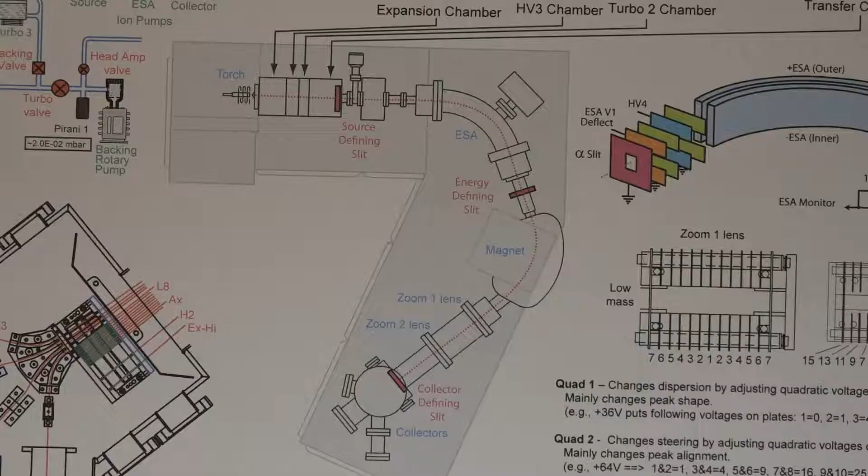What we're mostly going to be adjusting when we are tuning are slits in this transfer chamber here. So we're going to be adjusting things in the expansion chamber, the HV3 chamber, and the transfer chamber. You'll see those in the high voltage tabs and in the source slits.

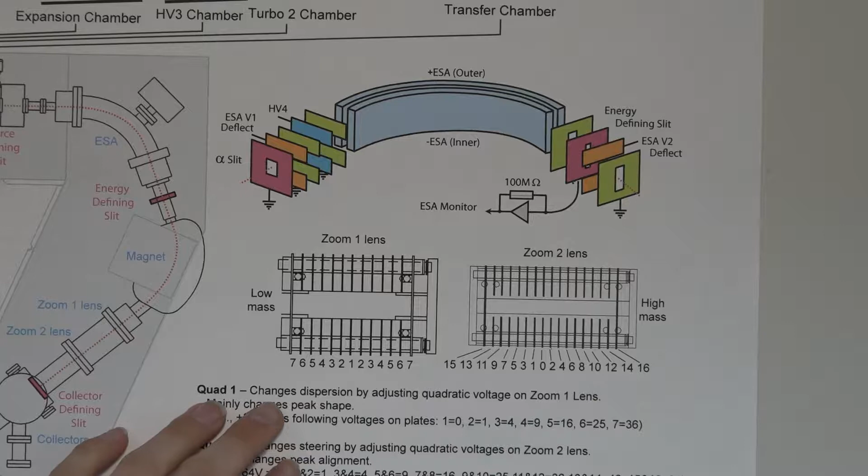After the magnet, you'll see zoom lens 1 and zoom lens 2. Those are depicted here on the right. Quad 1, which is your major shape changer when you're tuning, you're just going to change the quadratic voltage on zoom lens 1. So this is a big one for us when we're tuning.

You may want to adjust zoom lens 2 if your high and low masses are not really matching up and nothing you're doing with linked quads will bring them together. That's when you're adjusting zoom lens 2, and those will be Q16 and 15 correlations. They just adjust how zoom lens 1 relates to zoom lens 2, as you can see here in this schematic. Now we have a vision of what we're moving around.

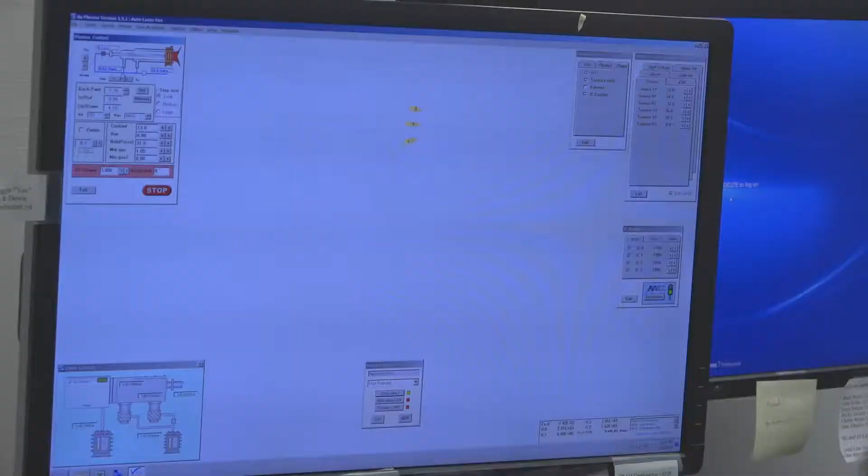Let's get tuning. Now we're on the new computer. I'm just going to recap a couple of things that are important. Over on the left is the plasma control. We can make sure it's lit here by making sure that's red. We've used this VAC button, we've checked reflected power, and we're going to hit a couple of other things for the torch over here later on.

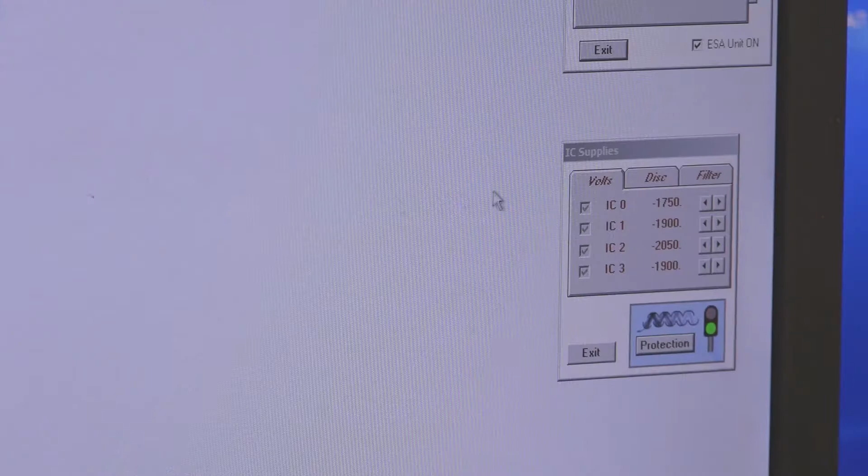As we move down, again, we'll see these valve controls, and we'll just reference our pressures here. Over to the far right, you'll see IC supplies. This is where we turned on our protection earlier. Up on the top right, you'll see the digital control, where we enabled our ion counters, where our high voltage units and source got enabled when we first turned it on.

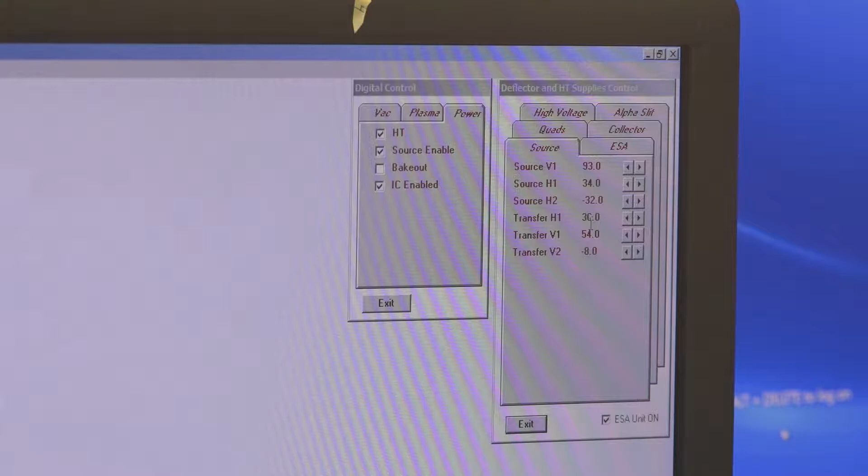We're going to be using a lot of these deflector and high voltage supplies over here, and the supplies control window later while we're tuning. Now we're going to just make sure we're on our right tune setting for whatever we're doing, and we're doing uranium lead with Faradays. We'll go to Setup,

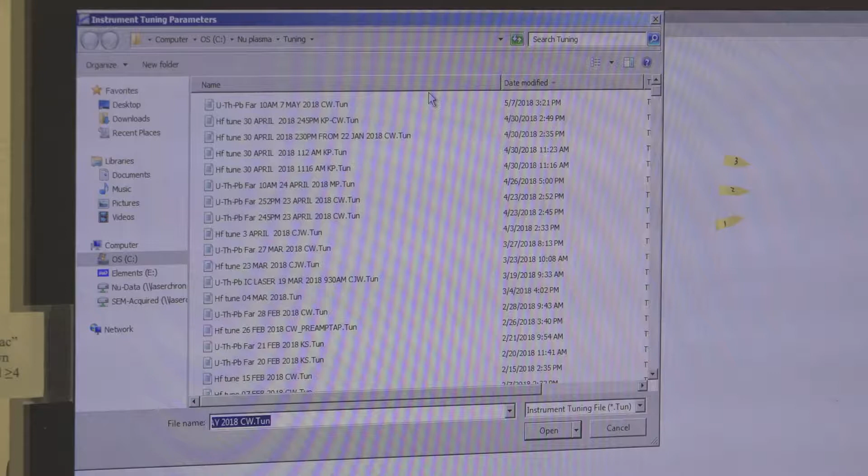Constants, Tuning, Initialize. And we're just going to pick the most recent tune file for whatever we're doing. We're going to do Faradays, so we'll just pick that guy. That's at the very top. And then we will say Open.

All of our deflectors and high voltage supplies will update to that tune setting, whatever those were set at. Similarly, if we move to the left under our plasma control, various torch positions and mixed gas settings will also update to that original tune that we've just loaded.

Once we've opened the tune file we want to start with, we'll go to Scans, Magnet, and that's going to scan across the range of masses that we're going to be using. What you'll notice is you have a start scan reference mass and an end scan reference mass. You may need to update those depending on what was previously tuned for before.

To do that, you'll go to Edit Scan, and you'll just update it to, we run between 214.3 to 215.3. But depending on where the mass actually is, where all of our signal is reading, we may need to change that. So we'll leave it at 214.5 and 215.5 for our Faraday tune. And we'll just save that edit.

And let's enable the grids. It's just a little bit easier to see intensity changes with the grid on. So you'll just tick grid.

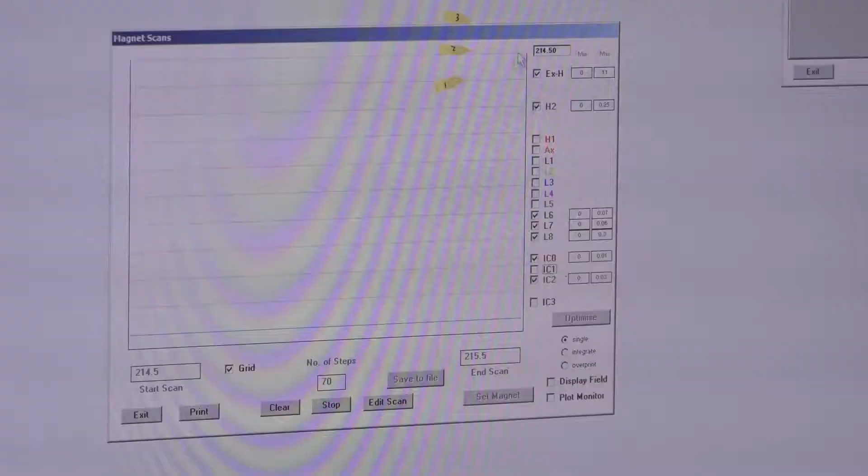We'll also want to enable L6, L7, L8, and then IC0 and IC2. But our main one that we're going to focus on during tuning is this EXH, our 238 uranium. I'm just going to go over to the laser computer and press Start Run, and then Start. And what you're going to see next, as it approaches the appropriate masses, is a little peak form of what we have checked.

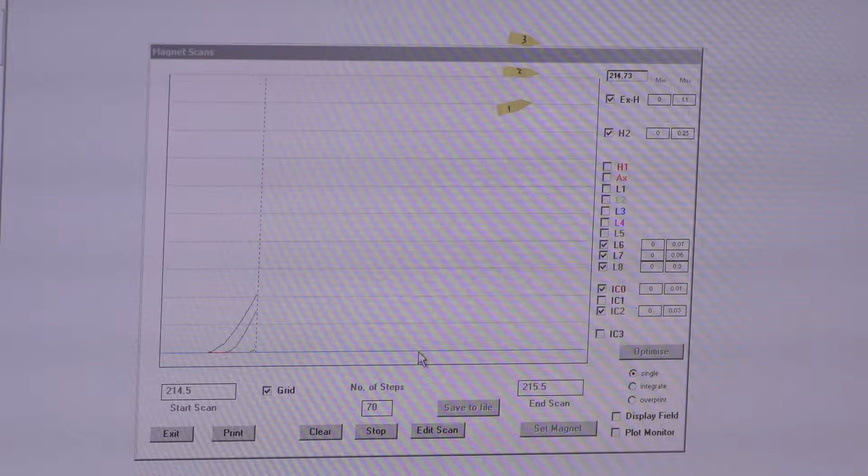Now the problem here is that our scales are a little bit off, so let's go ahead and change that. To change any scale in here in this magnet scans window, you just double click on your min-max, whichever one you want to change. I want to change the max of my 238. I'll double click. It looks like we're coming in at about, let's wait for it.

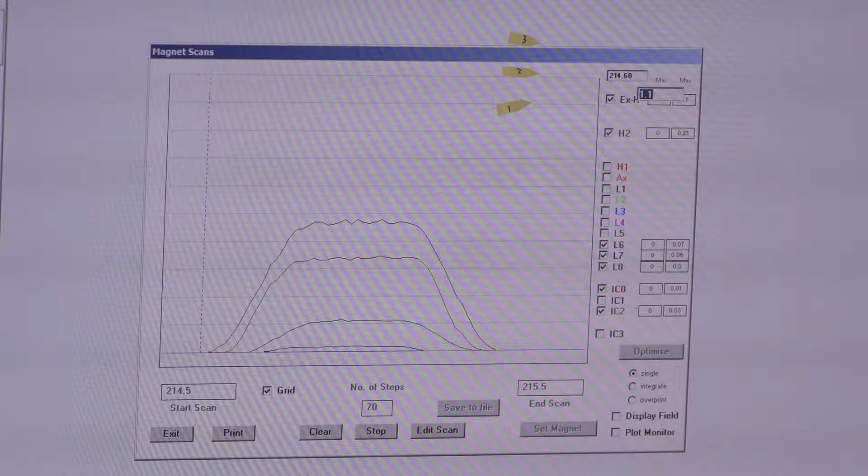At about 500 millivolts, let's put this at 0.9. Anytime you want to increase the height of your signal, you'll bring that max number down. And anytime you want to decrease the height of your signal, you'll bring the max up. That's true for all of them.

So in order to monitor signal, we have a couple of options. We can just watch this line go up and down and set our min max, or we have this cool screen down on the bottom right corner. We can monitor any of the Faraday cups or ion counters that we want live as it scrolls across them on that magnet scans window.

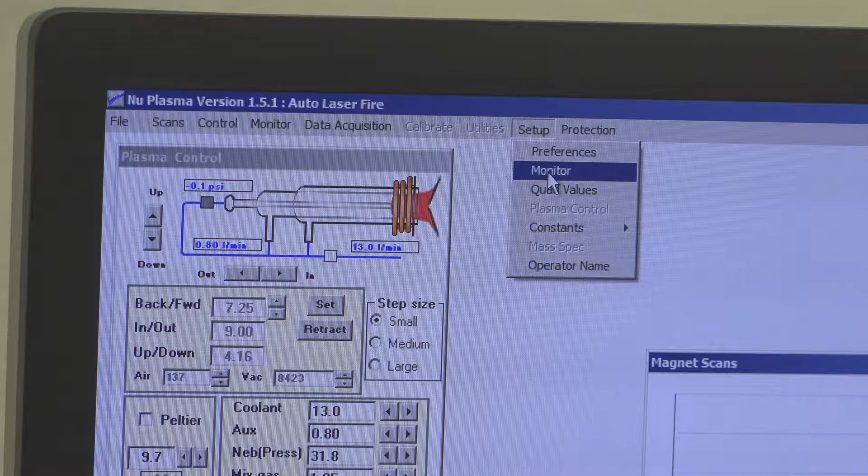So I have what I want now, but if I wanted to change it, I'd come all the way up to the top left to setup. I'd click that, I'd go to monitor. I get the option to look at any one of these that I want, up to about 6. I can watch 6 at a time.

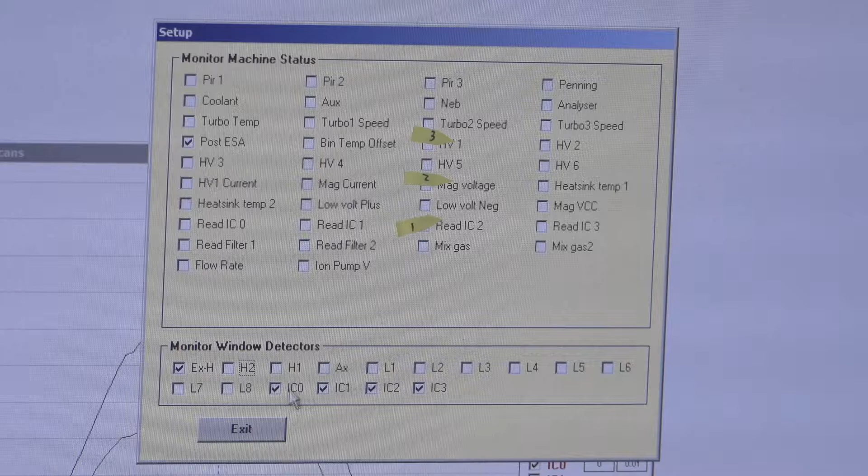So I want to watch my EXH. If I wanted to watch thorium, I could add it in, and then I'd see it add in if I had room. So if I unticked IC0 because I didn't need it, I'd add H2. Now if I move to the bottom right, you'll see that I have H2 instead of that IC0 in there. But we don't want H2, so we're going to come right back up, untick H2, and put IC0 in there. Then we're just going to exit out of there, and now we're monitoring what we want to monitor.

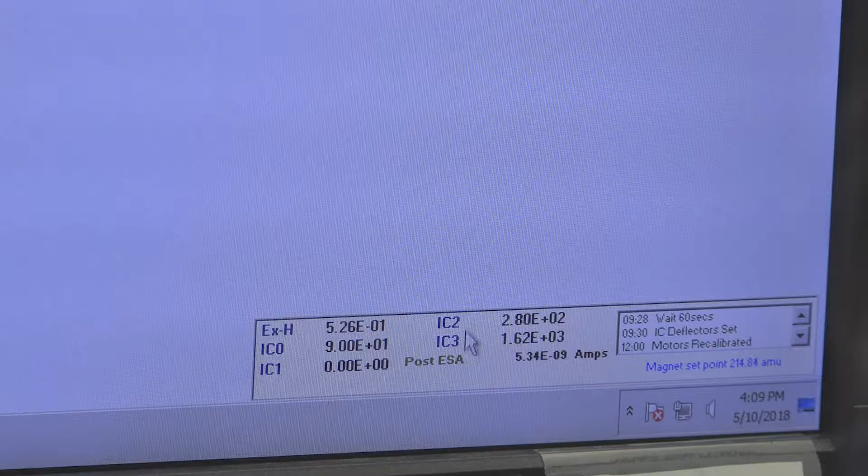So now at its peak, if we look down and monitor our EXH, it's about 500 millivolts. And then it washes out as it cycles through. We'll see it happen one more time. There we go, about 520 millivolts. So that's pretty low for us. We got a lot of work to do here.

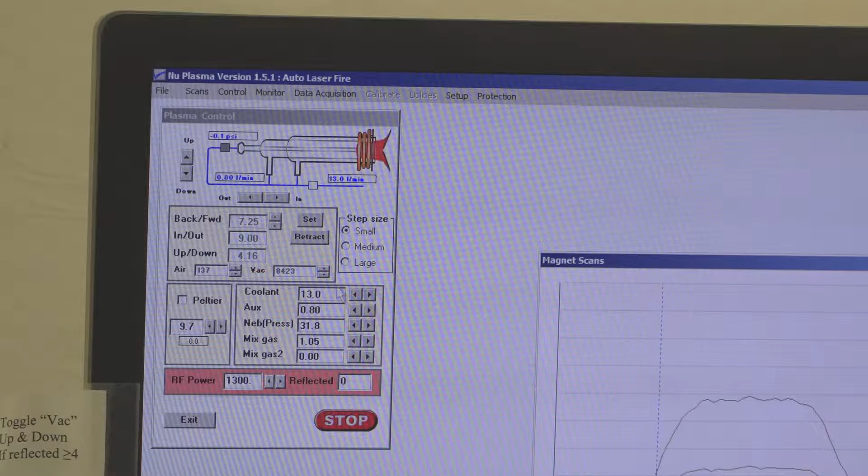The first thing you want to check is torch position. Anytime you have a false start or it just doesn't light right away, your torch will back up. So we're going to check our in-out torch position to see if it's backed up on us. So in-out is reading right here, and it's at 9. It's usually around 6 units, so it's sitting at 9 units now.

So I'm going to go up to these toggles, these in-out toggles, and I'm going to move it in. The one thing I'm going to do is set that magnet on one mass point. When you're tuning and making changes, you want to be on the max signal. So I'm going to wait for this to go through my whole peak first, one time.

Once it's reached the bottom, I'm going to stop. And to peak center, to be on that main peak and watch that over time as I change, I'm going to right-click on this dashed vertical line and drag it into the middle of our mesa. If you don't have a mesa, don't worry, we'll get one. So we'll leave it there.

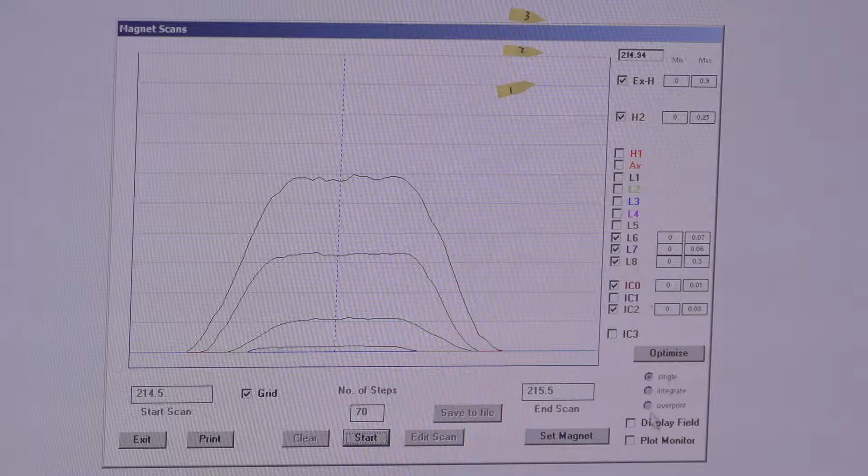Once I found my middle, I'm going to select Set Magnet, that button on the bottom right of your magnet scans window. At that point, you'll see your start scan and your end scan reading the same exact mass. That's what you want when you're trying to just get high peak intensity.

So now we're going to go in-out and change that 9 and kind of move it in and see if that gets us a little better signal. I'm going to just move it in a couple clicks at a time. Be very careful with in-out, you can totally break the torch. Don't do that. So just a couple clicks at a time.

Looks like we're improving it already. We'll do a couple more. It's getting better, we're just going to keep going.

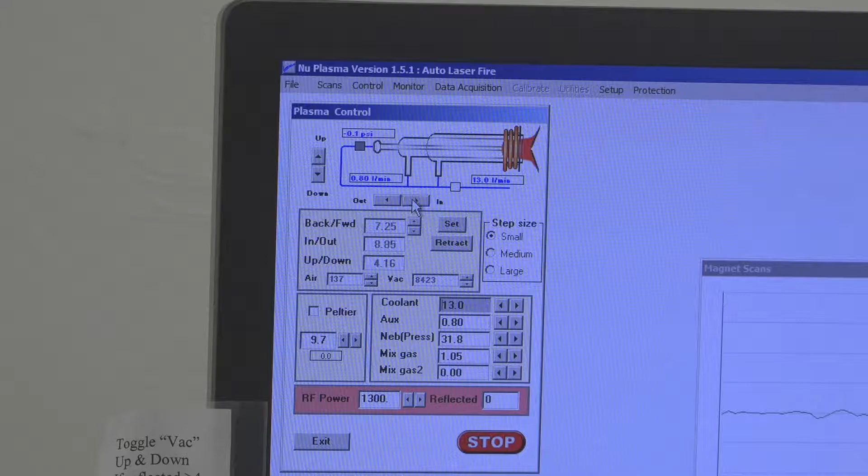You never want to get closer without looking than 6. Once you're at 6, you really need to be paying attention to how much you're moving in. So I'm just going to do a couple clicks at a time until I feel like we've lost any signal increase. It's going to just take a while since we're out at 9.

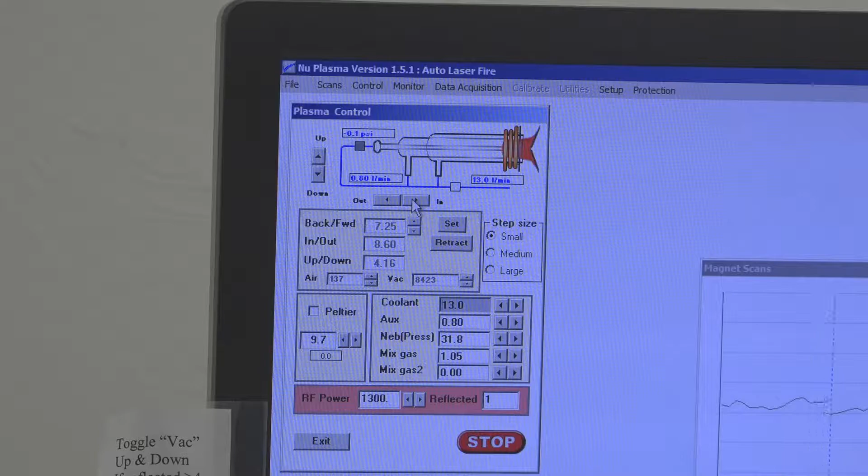And we'll just keep moving it on in. There is a point at which that's no longer true, and then you're too close and you're kind of missing that sweet spot. So we're just going to move in until we find it.

And it just keeps increasing and increasing, and at some point we're going to have to change that max so we can see how much better it's getting. We're at about 7.9 now. We can go at least a full 10 clicks before we need to start worrying about how close our torch is.

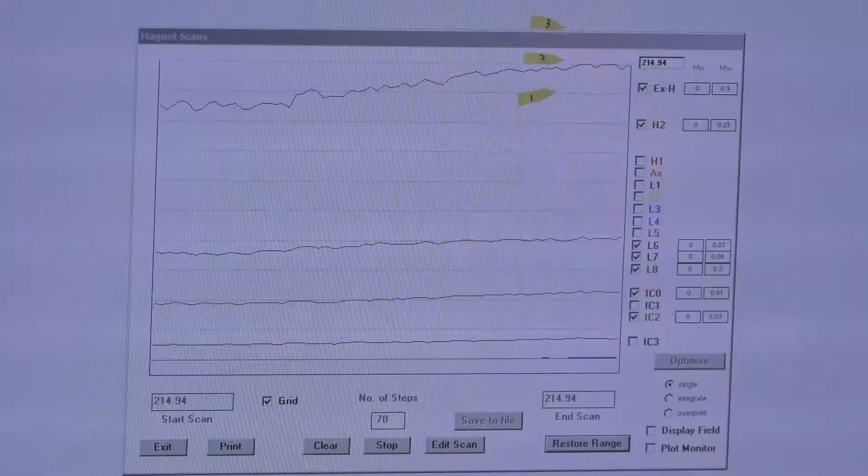And so we've reached our max here with what we've set for 238. So I'm going to go back over to this max, and I'm going to change that because I expected to get a lot higher after doing this. I'm going to change that to 1.5 volts.

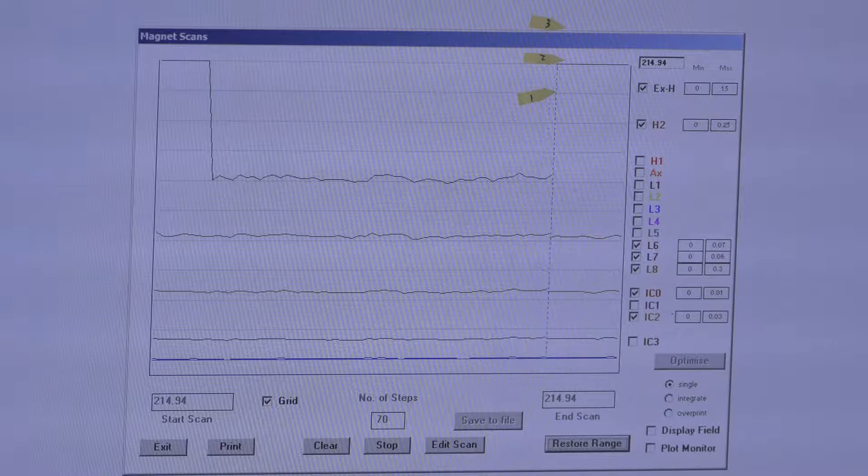And you'll just enter. And so now, since we've brought our max up, our signal now is down because it's much lower than our max set point, and I'm going to just keep on moving it in. So as I'm bringing the torch in, it's sort of changing the pressure at that point where it's entering into the cone. So that's changing our reflected light setting here. It's okay where it is now.

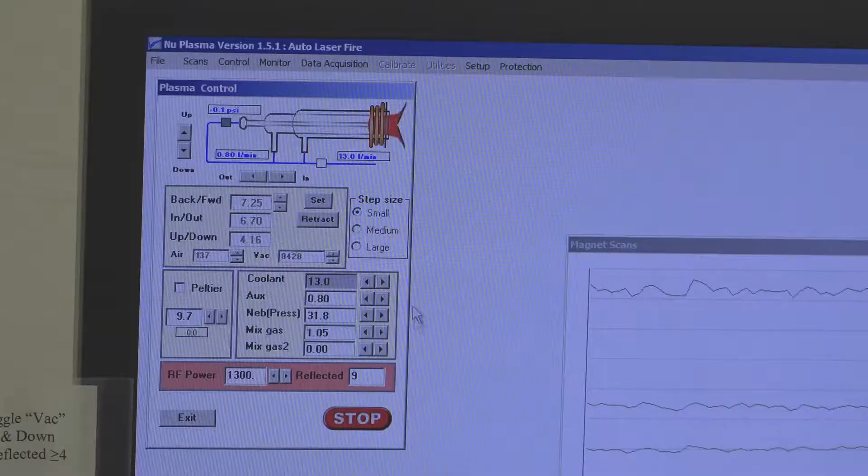I'll set it once we've brought our torch into where we need to be, but if that gets too high, past the teens, go ahead and take care of it by toggling back up and down 1 or 2 clicks. But right now it'll sit fine until I'm through adjusting the torch position.

We are right along a crack right now, so we're not getting much signal increase, unfortunately, which will happen, and that's normal. The crystal is pretty heterogeneous. So I'm going to take care of reflected by toggling back up or down once, depending on what direction I need to go, whatever changes this value the most, back to 0.

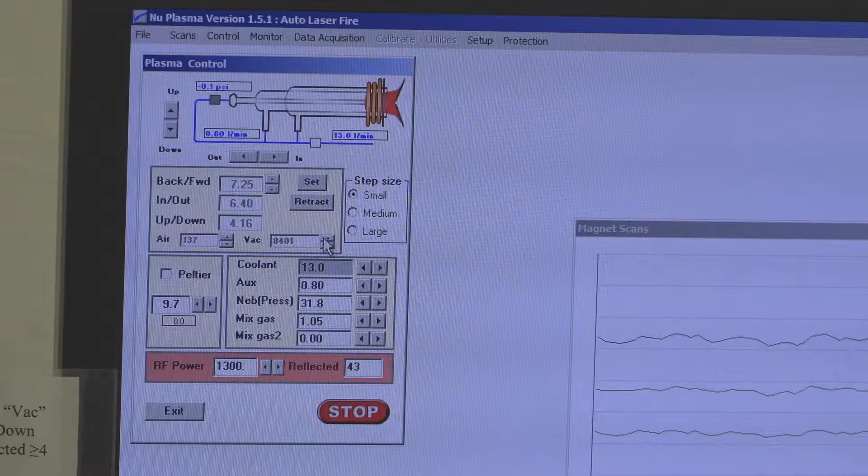That's definitely the wrong direction, so we'll go back up, and now we're sitting at 0. We're happy, we're good. We continue moving that torch in, a couple clicks at a time.

All right, so we'll move in a few more clicks. We're getting into the dangerous territory of 6, so let's pay attention. So if you do find that you're moving it in really close in the 5.5, 5.6 range, it's probably because someone, it may have been you, pushed the bonnet back more than we're used to. And that's okay, but just know that 5.5, 5.6 is not a normal range for us to be operating in, and don't get comfortable leaving a torch there.

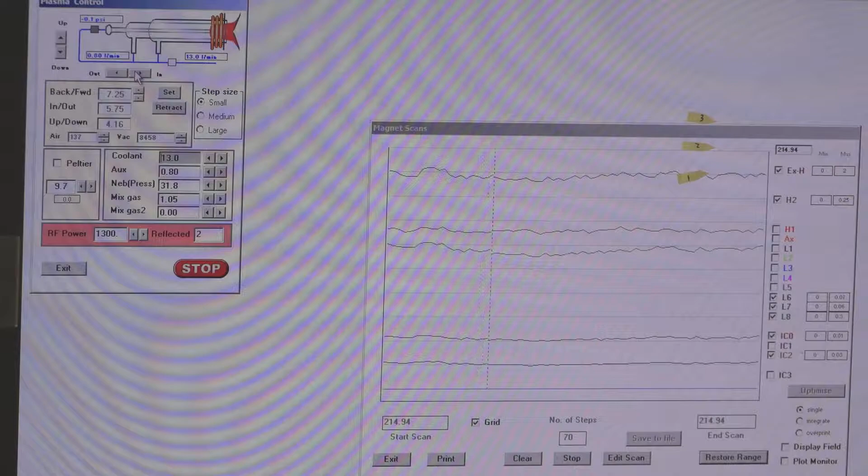And so I think we've reached our point at which we're finding the sweet spot. A little bit more out of it, but we've tapered off here, and I'm going to back it out just a little bit to see if it changes, and back it back in. So I think that's sitting its best at 5.75.

And you can check that by backing it out and then backing it in a couple clicks and actually tracking that trend to see if it's consistent. If it's all willy-nilly, that has something to do with the crystal and nothing to do with you. But this looks good for us.

Once we've moved our in-out position, the next step is to move our up, down, and our back forth positions on our torch. You have no danger of running into the cones when you're moving these, so you don't have to be quite as terrified.

But still be mindful of what you're doing and don't click more than 4 times in a row. So these are going to be big changes at first, and then once you're pretty close to the operating range, you're not going to notice much differences. So we'll go up and down 2 clicks. I'm going to go up 2.

And you can see your up-down changes here if you want to see that actual measurement. It looks like it got worse, but I'm going to make sure it's worse by going 1 more click. And it looks like it's still bad. So let's go down 3 clicks since we moved up 3 clicks.

And there is one important point to mention with moving the torch, and that's that just because you moved 3 clicks up and 3 clicks down, you're not actually going to be in the same spot. Sometimes you need to go past the point that you need to go back and reach it. So that looks great. We'll leave it there.

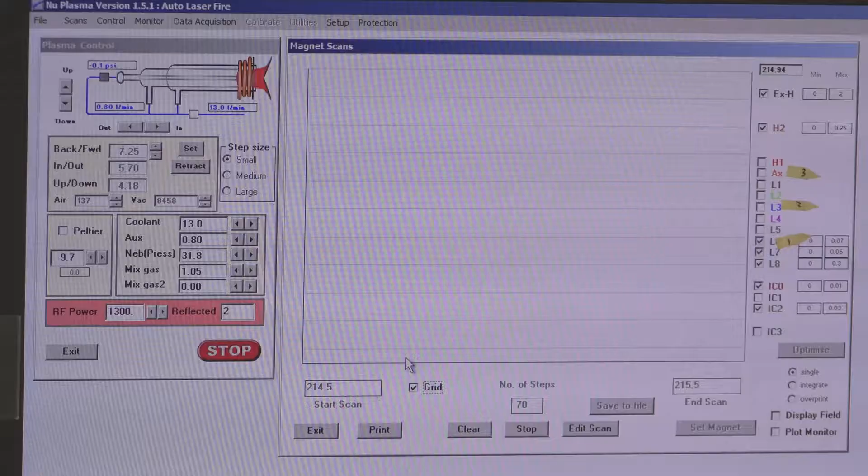Now that we've gone through our torch position, it's always good to check your peak. Anytime you make big changes, physical changes within that chamber, it's always a good idea to check how your signal is being received. So we'll go back to restore range, and that's going to give us that full range of masses from 214.5 to 215.5. So let's go ahead and do that. We'll wait for our peak to appear.

Definitely have more signal. Looks like we got a rounded shoulder here. This corner looks pretty okay. And then we sloped out. So the ideal here when you're tuning is not only to increase signal intensity, but to improve peak shape. And by peak shape, I mean, in an ideal world, you'd have a little box sitting up there with really straight sides, flat top, straight side, a little mesa.

That is just not the way it works for longer than a day. So you're gonna get a little slope here, a little slope here as the signal comes in and out. And you may have some angling here on the shoulders as they come off from that top peak, but you want a flat top certainly at the very minimum, and you want to minimize the rounding happening at the shoulders here.

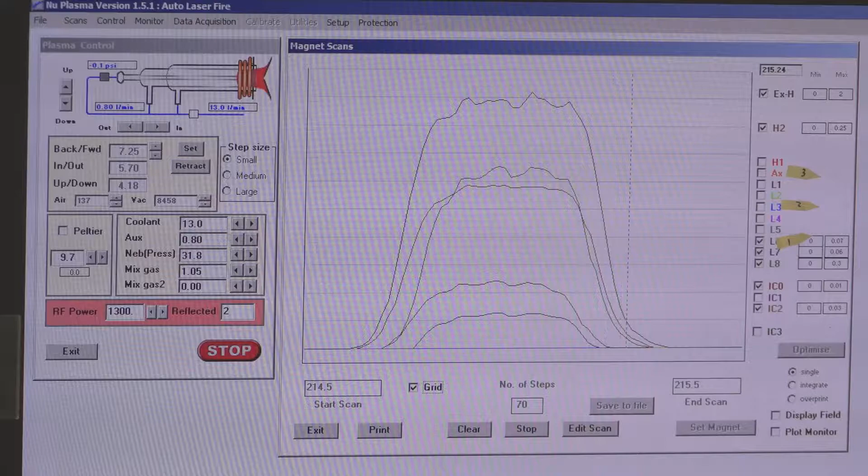And what happens over time is as your slits get worn, you're expanding the opening, which means a lot of material gets through, but peak shape kind of suffers just because your slits are no longer well defined. So there's a trade-off there between intensity and peak shape, which is where we're approaching now in this video. The slits have been in there for a little while, so we're getting a little bit more signal, but our shoulders on this peak are suffering just a little bit.

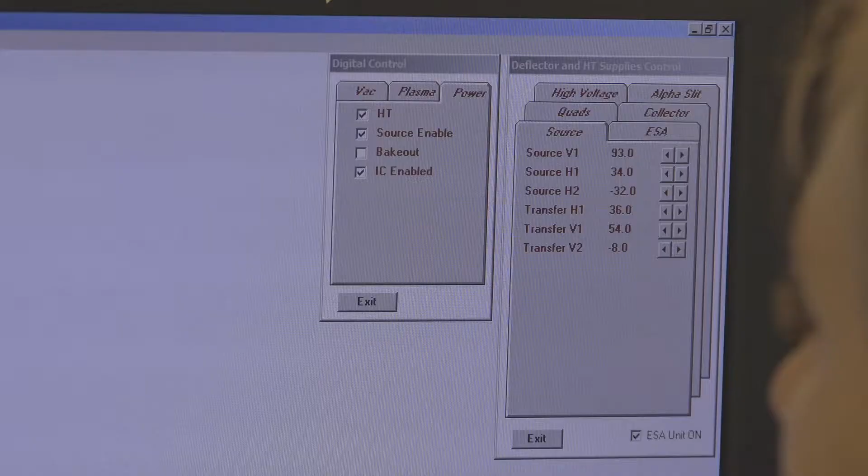There'll be a trade-off there. When they're brand new, you'll get tiny amounts of signal, but a beautiful peak shape. It's just the way it is. So we need to deal with this shoulder, certainly, when we're tuning, and if we can widen this peak, we're gonna try to do that. And we're gonna change that with our high voltage.

So we're gonna go over here to the right to change peak shape and intensity. We're gonna use our high voltage here, and also our source, and also our quad. I'm gonna move the high voltage and sources over. This is not how you're gonna see them, but this will just be easier for viewing. They're normally gonna be over to the right from where I pulled them from.

So as I was saying earlier in our little demo, we are gonna change peak shape the most with this quad 1. We're also gonna change where it's sitting on this range of masses by moving quad 1. Just to demonstrate that, I'm gonna really kind of psych it out a little bit. I'm gonna move quad 1 quite a bit, and you're gonna see the changes here. So now it's moved over to the right.

And it looks like we've lost a little bit of our width here on the top. And we'd also need to change all of our masses and kind of put them underneath our 238 EXH mass. So I'm gonna move it back to 50 where it was sitting before, so you can see the difference. And this is where we had it originally.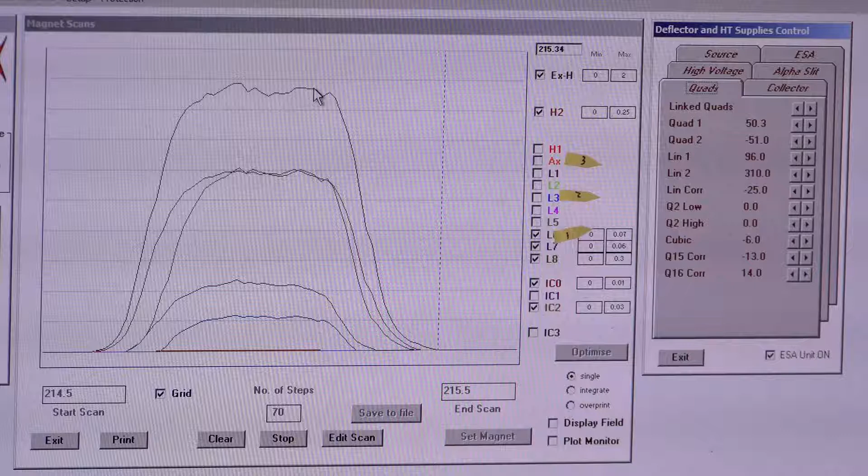So I'm actually pretty happy with the peak shape other than that shoulder. So instead of adjusting quad 1 initially, because we don't want to push quads up if we don't have to, I'm going to go through source slits and high voltage units first. And then if I need to make some adjustments to peak shape, I'll do that later with quad 1.

This is a very honed tune file. That peak shape is pretty good. We're not going to get it much better than that during this video. If it weren't, however, you might have something that, say, looked a little bit like this. I'm going to get crazy here and change quad 1 a lot.

And what usually happens when you have lower quads is you have a volcano. If you have quads lower than you need for what you have going on in the mass spec, this is the sort of situation you're dealing with. And to take care of that, you'll need to change quad 1. You'll need to bring it up. So I'm going to bring quad 1 up a little bit.

And you'll see that get a little bit better each time I bring it up. It's a little bit taller, a little bit less volcano-y. Our masses are getting closer together. Now, one important note that will also happen when you are dealing with something like that is generally these masses are already going to be underneath it.

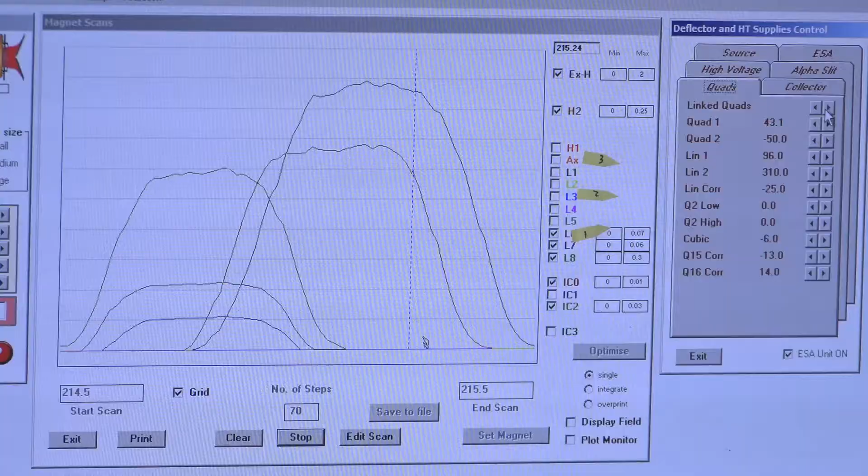So if I were to move linked quads, I want my low masses to meet up with my high masses, so they need to go this way. So I'm going to move them right. And you'll watch them walk across to the right as I change that, and then our high masses are going to walk a little bit to the left. But when you're thinking about changing linked quads, you want to think, which direction do I want my low masses to go, and that's what you press. So I want them to go right a lot, so I'm going to press that a lot.

Another important note is to not change quads very drastically without also changing linked quads to match up. So what I just did, where I moved them all willy-nilly as an example of how bad it can be, don't do that normally. So you're going to want to move quads a little bit, then move linked quads to match up, then quads a little bit, linked quads to match up, and that's how you're going to go about business.

And you'll see that each time I move them closer together and get them closer to the quad point that I know works, they're going to get a little bit better each time. So you can really get things out of whack if you're not sure which direction to go, and then bring them back together, and that's how you can convince yourself you're on the right track. Once you've done this a lot, you won't need to do that, but I needed to do it in the beginning, and so will you.

So let's just put it back where we know they work. Quad 1 was at about 50.3, so we'll bring quad 1 up first. And just to stay true to my word, we'll move linked quads too. We'll bring them over to the right just a little bit. Get those guys lined up first.

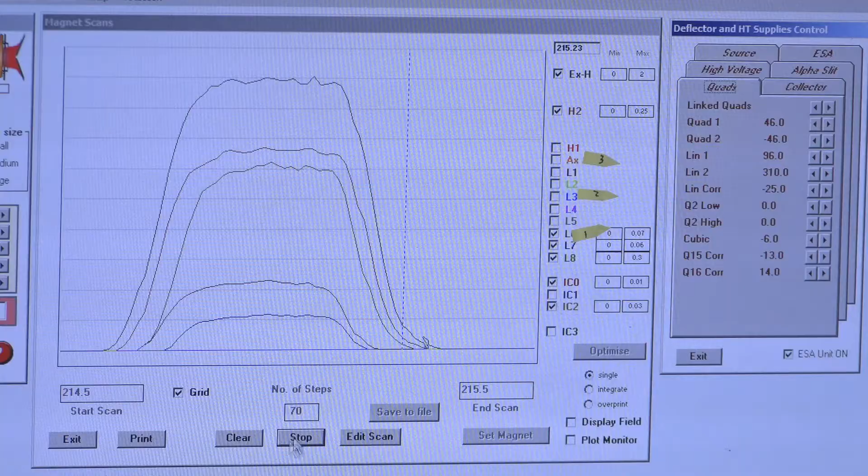Peak shape's looking a little bit better. And so I could stay here and then go through my high voltage and source and then come back to see if I need to change quads a little bit more, because the idea is that quad 1 stays pretty low. So if I can keep quad 1 at 46 instead of 50, that's great. So maybe let's start there. We'll do some changes and you'll see how that kind of affects peak shape and signal.

So we're going to do the same thing we did with the torch. We're going to stop once we've gotten a full peak to look at. And then we're going to go set magnet by right-clicking that vertical dashed line into the center of our masses and then setting our magnet.

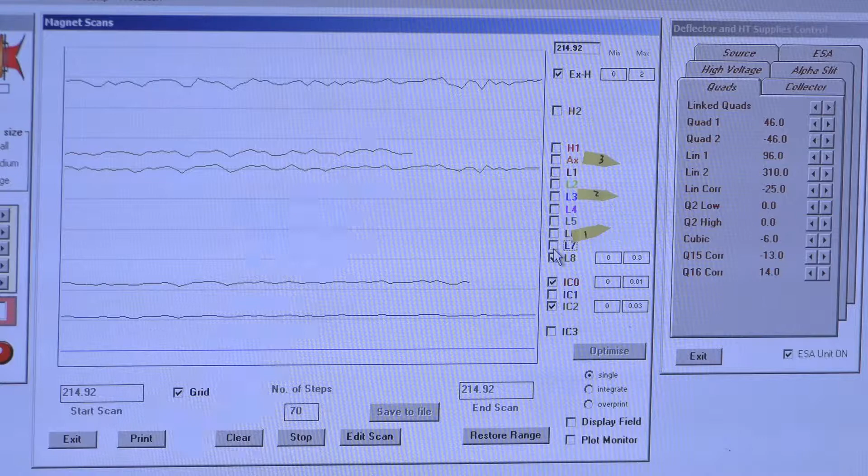Now, if all of these lines are distracting and you have no idea what you're looking at, you can untick them. You don't need H2, you don't need 232, you don't need all of these L5s, L6s, L7s, L8s. You can untick those, clear everything, and just be working with your 238 until you're ready to look at that full peak and see how it looks with all the other masses underneath it. And that's maybe the way to go when you're first starting, just to not get distracted.

So here's our 238 line. I'm going to go into my high voltage first. That's always a great place to start. So the first thing you're going to change is HV1. This is the weirdest one you're going to be changing because you're actually trying to find the center point for HV1. So it's sitting at 6018 as a voltage. What we're going to do is go 30 above that point and 30 below that point. And if those two changes are similar, then we know 6018 is the good voltage. If they're really, really dissimilar, we'll maybe try a different midpoint like 17, and go up 30 and below 30 from 17 and see how that looks.

So let's go up 30 from 6018, so it'll be 6048. Enter. And it should drop quite a bit, and then let's find the other side of that on the low end, which is 5988. And we'll wait till that gets there on the other side. And so there's a little bit of a droop. So let's see if we can make those two distances much smaller. So let's go 5987. And then let's go 6047. Now that distance is even greater, so I'm not on the right track.

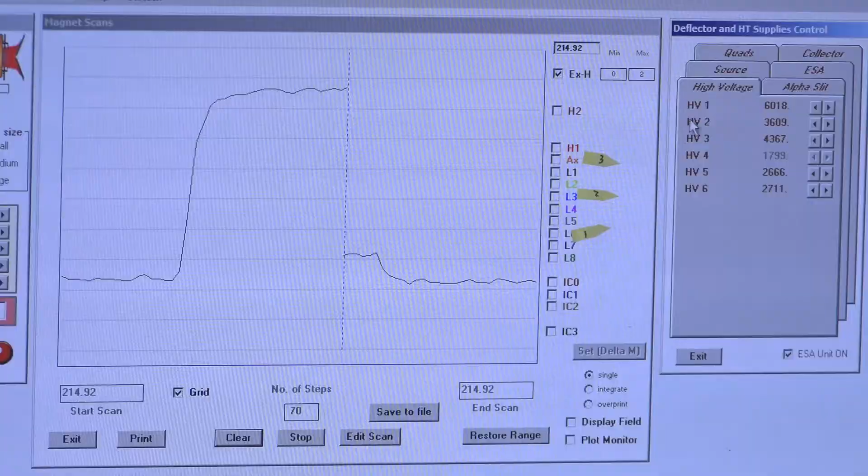So let's go above 6018 and go 6019. Let's go to the high point of that, so 6049. And then the low point, 5989. And so our distance is still a lot greater. So what that tells me is that 6018 is where we're gonna be for now. But we'll just check it, 6048, 5988, and that's our lowest distance. We're gonna go there. So our midpoint for HV1 is 6018.

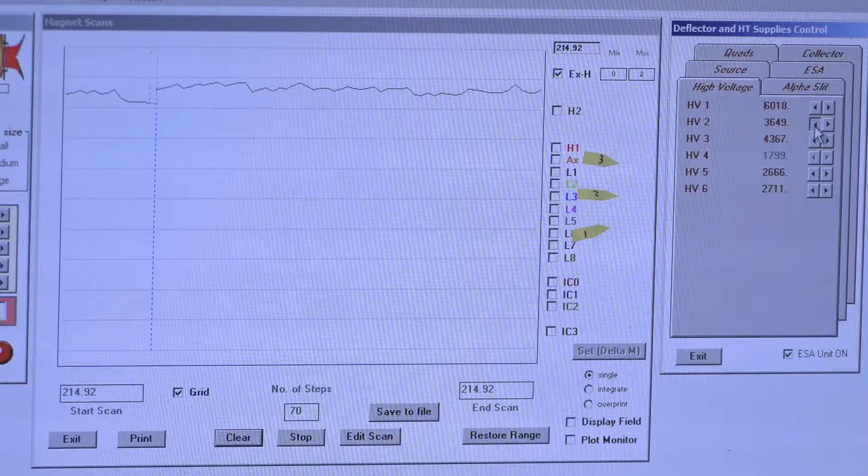Now we'll move to HV2. HV2 and all the rest in this list, you're gonna change by increments of 5 and 10. You don't need to worry so much about one clicks. You really just want to see changes at this point. So anything that's making a good change or a bad change is what you're assessing, and then how much of a good change. So HV2, I'm just going to go up 5 clicks. I can't really tell any difference, so I'm going to go up 5 more. Looks like it's dropping. So I'm going to go back to that original 10 clicks ago.

Looks like the issue here is that we're going over a pre-ablated portion of the grain, so we're not really getting a good indication of our progress. So let's wait for that to stabilize. And since we're on the subject of stability, another thing you're looking for while you're tuning is a stable signal. So things like this, with big giant dips when we went through that crack, are not ideal. So if you're seeing a lot of noise in this line or any of the other signals, the Faraday cups or ion counters being an exception because they're so low that you're gonna see a lot of spikes depending on how you set your min and your max, you'll just wanna pay attention to how much noise you're seeing in here.

And there's usually very little noise in the tuning signal if you have no other interference on your grain, like pre-ablated sections or cracks. So if there's tons of noise, make sure you're not on a weird section of the grain. And if you aren't, maybe pay attention to the last thing you changed and if that makes your signal much noisier. So if you're seeing a general signal that's stable, maybe a couple of hiccups here and there, you're probably on the right track. But if you change something and all of a sudden you've got mountains for days and valleys for nights, maybe reassess how smart a change that was. Something to note about HV2 is that you don't want to bring that up too high.

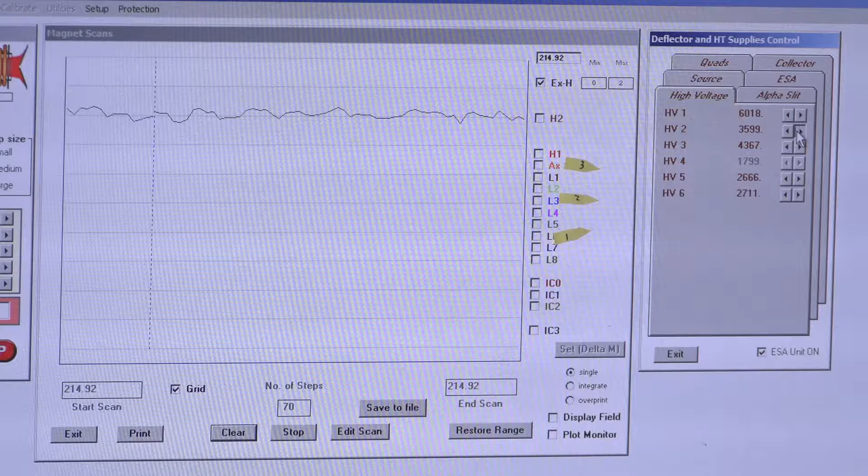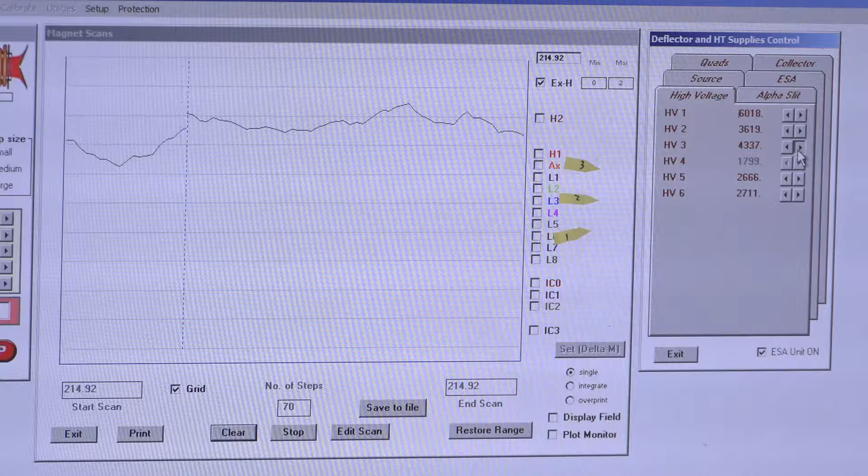So let's just click it a few more times to see if we can improve it without damaging anything in the long term. Let's try bringing it up a little bit higher. So now we're at 3709, and it doesn't really look better, so I'm going to bring it back down. So I think our sweet spot is about 3619 or 3629. I think 3619 is much better. So we'll leave that there.

We'll move on to HV3. Again, up 5, up 10, then back to the original, down 5, down 10, back to the original, and then pick your favorite spot. That is not the right direction. And neither is that one. So I think it's about where it should be, so let's bring it back up.

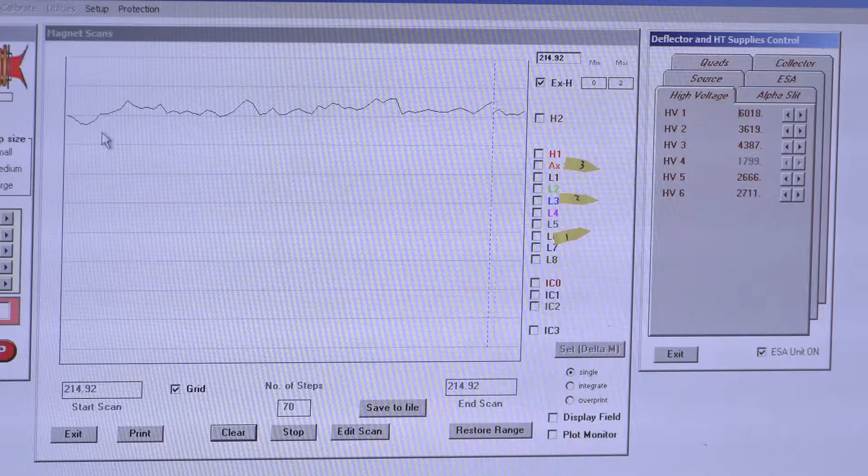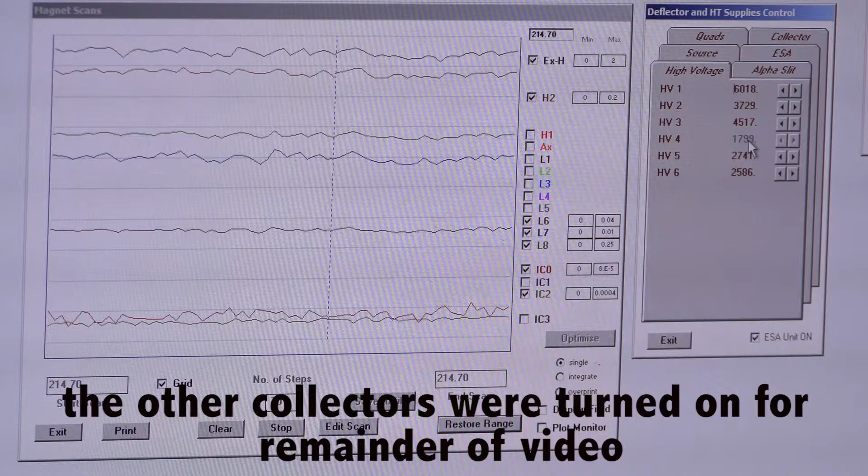And in your initial tuning phase, it's not a bad idea to write down all these original values and go ahead and check how far off you are from them when you look at the peak shape. That'll actually help you learn what you're really changing and how much it does when you change them to affect signal quality and also the shape. So we'll leave it at 4387 for now. We're also getting a lot of noise in there, so we'll have to address how much worse that's going to get over time. So now let's move to HV4.

I want to point out anything grayed out is something that's an instrument setting that's been protected, and we don't want you to touch those on a day-to-day basis. Those are special case scenarios. So for HV4, which is grayed, and any of the other things that you're going to be seeing that are grayed out, don't worry about those guys. You're not supposed to touch them, and you don't need to.

So now let's go to HV5. 5 clicks up. 5 more. We've lost some intensity there. Now let's go back to our original. And then we'll skirt around a little bit. And again, it looks like some of this is not all that I'm doing, so I always wait for it to stabilize when that's the case.

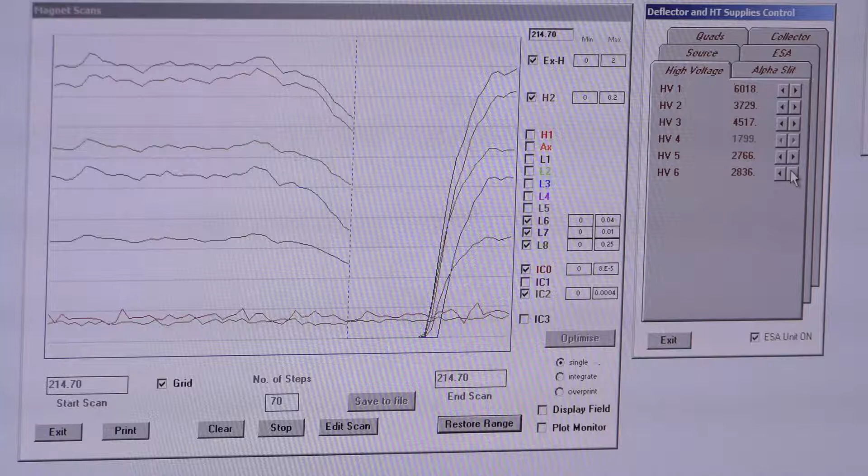I'd like to add another note about HV5, and that this particular one impacts peak shape quite a bit. So the higher you bring up HV5, most of the time the better and more mesa-like your peak will become. However, it will lose a little bit of our signal as it does that. So there's always a trade-off with HV5 for signal versus peak shape. So just be aware of that.

And a lot of times I'll just tune with a full peak with HV5 and find the best shape I have after I've already gone through these settings once or twice. So I'm just going to find the sweet spot. We'll just tune for signal intensity this first round and worry about peak shape on the second round.

Let's move to HV6. 5 clicks up. 5 more. Definite signal loss. Let's go back to our original. And then let's go down. And again, we have signal loss. So let's go back to that original set point. Maybe we can do a little bit better. Let's try a couple clicks in each direction. That looks pretty nice. All right, so that concludes our high voltage for the first round.

Remember, HV1 is a midpoint setting, so you're not clicking up and down that way. You're actually typing in above and below 30 of a midpoint. And then HV5 really affects peak shape. And those are the big ones for high voltage.

So now let's move to our source slits. For source slits, we're going to be clicking up and down. We're going to just click all day long. So let's do up 5, up 10, and then down 5, down 10, and see where we're at with source V1 to start.

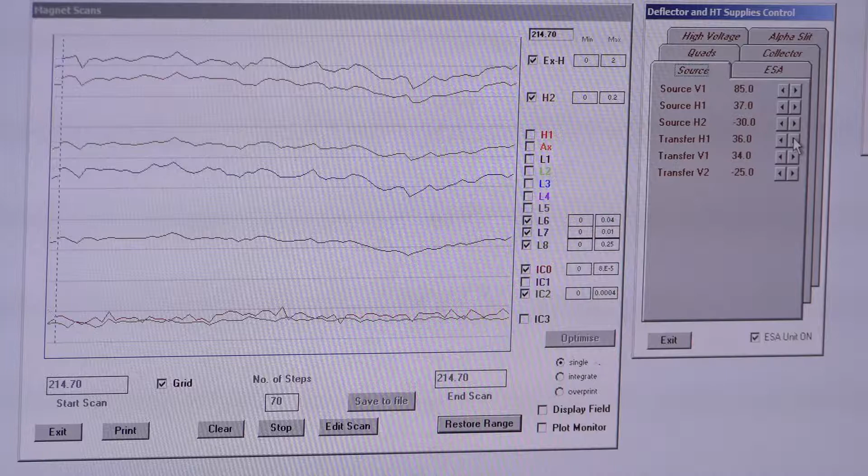So this looks pretty good. Source H2, you're going to notice big changes really quickly. You don't really need to go out very far to see changes with this guy. So I usually only go a couple clicks in either direction, and I'll start to see some big changes. It's really clear to tell for source H2 what the good midpoint is, where your stability is. So it looks like -31 or -30 are giving us really similar results. Just pick your favorite if that's the case. We're always going to go through our tune settings twice.

So transfer H1. Then we'll go back. Then we'll go down. And then we'll go back. So it looks like that 38 may be our sweet spot. So let's move on to transfer V1. And there's not a lot of changes with any of these transfer lenses, so don't get discouraged if you're not seeing a lot that's happening. It's pretty normal.

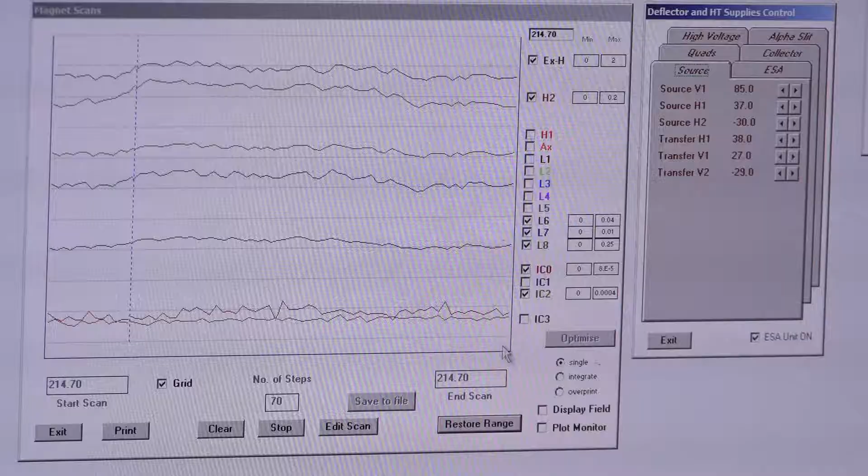So transfer V2. All right. Even I have trouble figuring out what the best settings for these guys are. So we'll just put it there at -30, or I'm sorry, -29.

So now that you've gone through your torch position, your high voltage, and your source, you're going to want to look at that peak and see how we've modified it. So we're going to go back to restore range and see what we've done to our peak. Hopefully you have a much higher signal, and hopefully we've actually improved the peak shape by getting those settings closer to a value that's operating in our range today.

So we have a much flatter top, slightly sharper shoulders here, which is great. But we still have quite a little slope here on our sides, good angle. And remember, like I said, the perfect peak is basically a mesa. So maybe we can get rid of these slopey sides in this next pass. And that's probably going to have a lot to do with our quads, and it's going to have a lot to do with our HV5. So at this point, once I've tried to maximize signal, I'm going to go to quads.

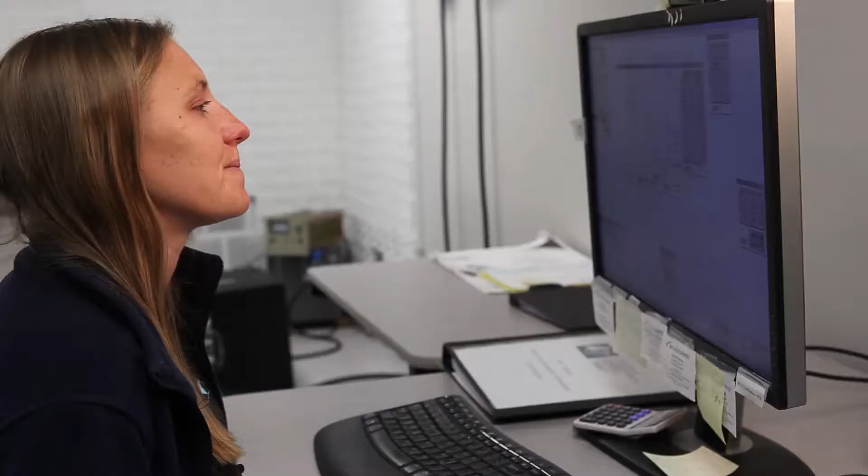Now, quads are something that really affect peak shape, and they're something that you may need to adjust first rather than last, depending on how new your settings are and how much you've changed in the instrument once you started tuning. So after big changes like tube changes, cone changes, glassware changes, that quad is going to be the first thing you're going to touch rather than the last. But when we're pretty close to a good tune, we don't need to adjust that just yet, because what usually happens is you bring your quads up, and we don't want to bring them up unless we really need to.

So I always go for signal intensity first. If my peak's pretty close, then I'll go to kind of change the peak shape a little bit. And everybody does it different. As long as you have a beautiful tune setting at the end of the day, that's what counts. But we'll just start with our quads now for our peak shape changes.

What you'll see is quad 1 is sitting at 48.8, which is pretty high already. I don't want to change that very much, so I may bring it up just 1. And I'll see how that'll change my peak shape. We've lost some of this angle here on the shoulder, but we've kind of added a curve here. So let's watch it one more time. It's always good to see 2 passes when you make those initial changes.

Good. And then the next thing I'm going to do is I'm going to bring my linked quads, these lower masses, underneath my high masses, and I do that using linked quads. It's right up top of quad 1. And what you're doing with linked quads to figure out what direction is you're going to move them whatever direction your low masses need to go. So my low masses, these guys, need to move left, so I'm going to click link quads left.

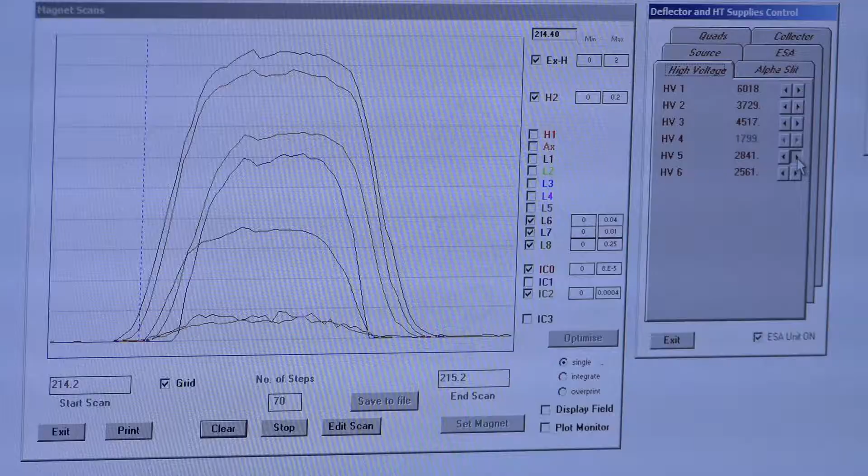We've lost a little bit of that shoulder, so I'm going to move HV5 up 1 more. We're getting a little bit less shoulder again, so maybe 1 more. But what I am noticing happening is we're kind of losing our flatness here, so I might back off on HV5 just 1 or 2.

Like I said, you can always go back to original settings to see if you've actually changed something you want to change. And if I'm not really sure that HV5 is moving in the right direction, I'll move it a lot. I'll click it up 4 and see how that changes my peak.

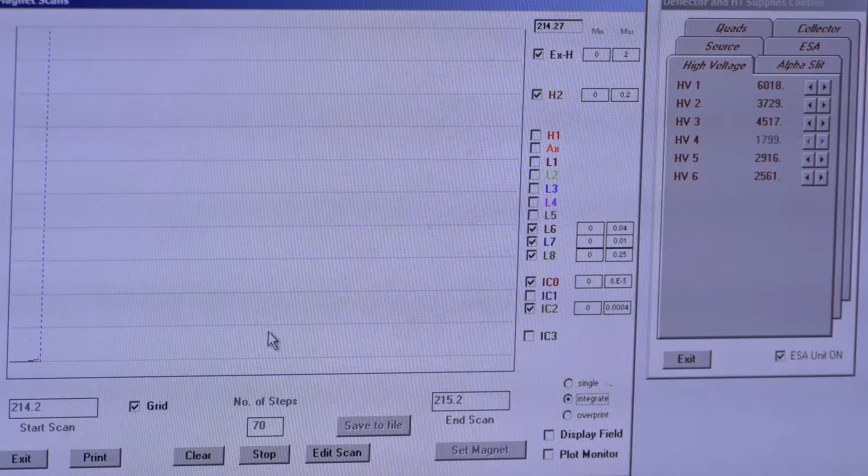So I've moved HV5 up quite a bit, but you'll see that our peak shape is so much more improved than before when we just moved our quads. I could have moved quads way up, I could have fixed this peak shape by moving quads very high. But I want you to know you don't have to do that, and it's not the right answer when you're trying to fix a peak shape when your quads are already quite high. So if you can help it, move HV5 before you move quads way up there.

So I'm actually going to try HV5 one more time to really optimize that shape, see if we can get it any better. It's already looking pretty good, but it looks like we still have a baby bald top here, kind of rounding a little bit. So that might look a little bit better.

If you're getting a little noise in your signal, sometimes you can switch over to integrate rather than single. And what that does is it'll integrate your signal for as long as you run the passes. So if I switch to integrate...

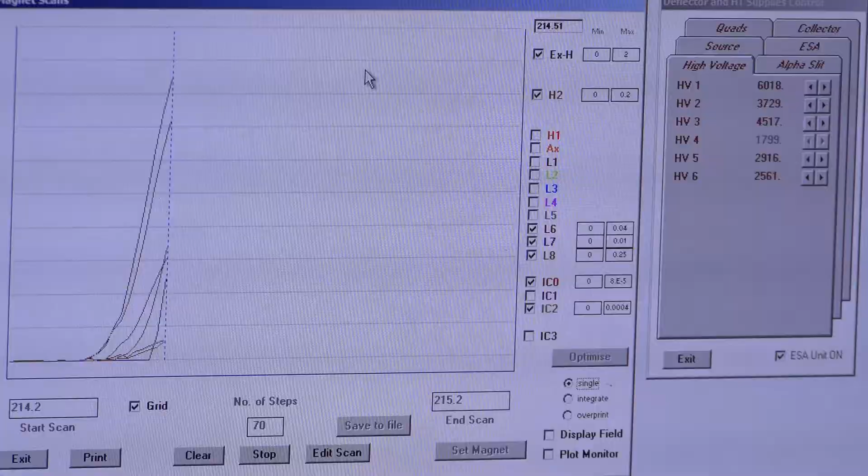You would see your first one, which would be the only single scan. And then as it came around and passed over it again, you'll see cycle number 2, so it's going to be the average of these 2 passes. And you could keep going to 100 passes. But we usually stop at about 4 to see general peak shape without noise. So we'll give it a couple more passes to see how it actually looks.

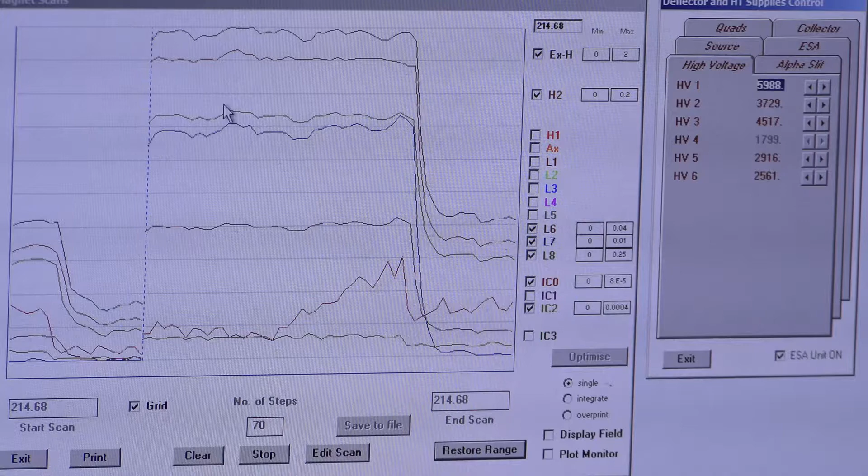But to me, there's still a little bit of rounding, which I'm not super into, so we're going to try to take care of that a little bit more. We're getting very close though.

All right, so let's go back to single. And let's look at that peak. And then we're going to peak center, and go through all of our tune settings one more time. We always tune twice at minimum. So we'll go ahead and peak center.

I'm just going to do all of the same steps we talked about before. So I'm going to find the midpoint of HV1, make sure it's still 6018. And it looks like that may not be true anymore. Got quite a big jump there, so let's change that. Let's try 19.

So it looked like 6019 was a pretty good midpoint, but let's confirm that. 6049. And then 5989, and that's a pretty small dip. So let's go with that. Generally, HV1 on your first pass always changes by the second.

That's pretty normal. All right, let's move to HV2. It's already pretty high, but we can go a little bit higher if we're brave. But it doesn't really seem to be changing much, so let's bring that back down, and let's bring it down even more. No, so that's sitting fine. Let's go to HV3.

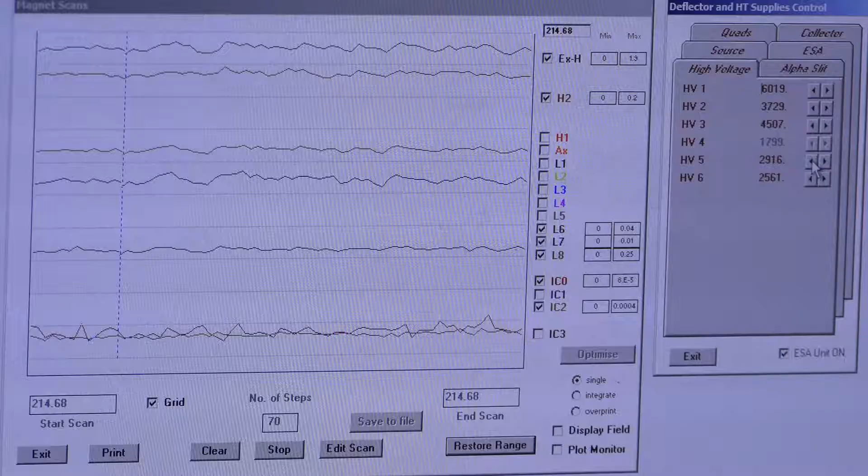Sometimes that can be more difficult to see, and if you're having a hard time discerning change, what you can do is go to your scale for 238 and get that line much closer to the top, so you can really see when you're hitting that max out line. So we could go 1.3 instead, and get it much closer here so I can see when I'm actually improving. That's always an option if you can't see if you're making enough changes.

These spikes happen again along the crystal. Since it's a heterogeneous crystal, there's different sections of the grain with different chemistry, so you'll see some spikes for certain elements. I see IC2 spikes, so that's a 204 spike. In general, our ion counter peaks for Faraday routines are very noisy anyway, so I just make sure they're underneath our major masses and that they're fairly flat, even though there's going to be a lot of noise in there.

Let's just finish up HV3, make sure we're on the right track. That looks pretty good. Now again, I'm moving to HV5. Now I feel like I'm in the right place. I may gain intensity by changing that, but I may not gain peak shape.

So I'm going to move it around, but I'm going to make note of this value if I need to go back to it to get my peak shape looking much better. Like I said, every time you bring HV5 down, you're going to increase your signal intensity. That just may not be the right choice. Just depends on what's going on that day.

All right, let's move to source. Just go through our tune one last time.

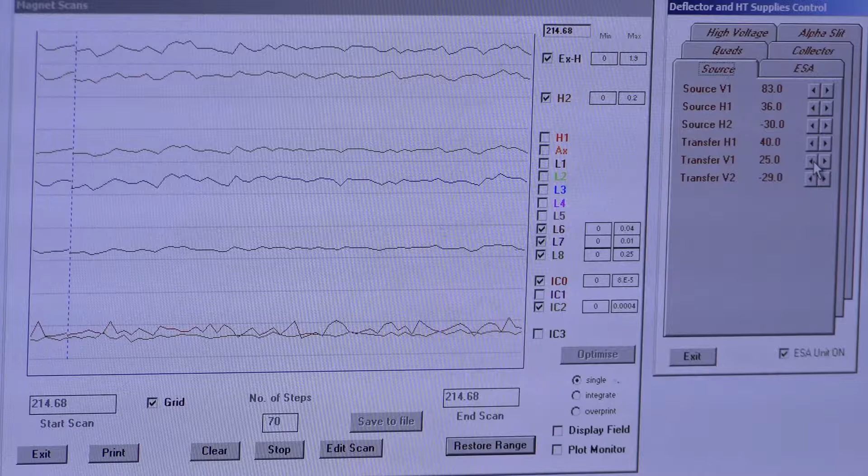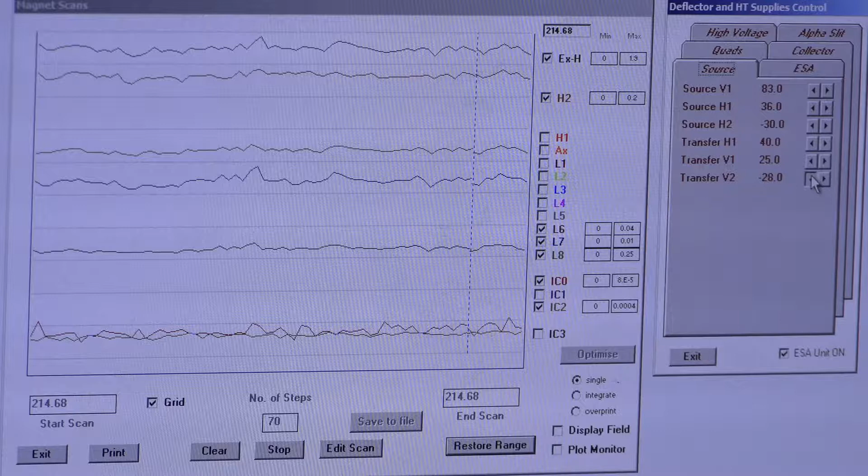While I'm doing this, I'll tell you another great strategy: actually look at your peak after you change each one if you want to see what they're doing, and you're not confident that you're doing anything, which it feels like some days. Don't worry.

So if I were to go through all of my high voltage units, maybe I'd go check out my peak shape right after that so I can see how those changes had affected my peak shape. Or as I go through each one, I can go check my peak shape and see how it's changed. That's a really great learning technique that you could try as you're learning how to tune and getting a feel for the new.

It's something I had to do just to get things locked in. So don't feel like it's redundant. It's not—it's always good to see how changes you're making are affecting the instrument.

All right, so let's check out that peak shape. I've gone through everything. We haven't gone through torch position.

We only go through torch position once. Once your torch is set, it doesn't really change. And in fact, anytime you make a torch position change, you need to go through all of your tune settings again. It's a big factor in peak shape.

So if you decide later on that maybe you didn't do a great torch job, don't do that at the end. Do it at the beginning, and then you'll have to go through all the other stuff anyway. So leave that for the beginning of your tune session, not the end of it.

But we're looking pretty good. We have the tiniest rounding happening at the top, but we have some nice, pretty approaching vertical sides. I wouldn't say they're vertical—I'm not delusional—but we still have some rounding here. I'm going to adjust HV5 to see if I can take care of it. And if I still can't take care of it with HV5, I'm going to go back to our quads.

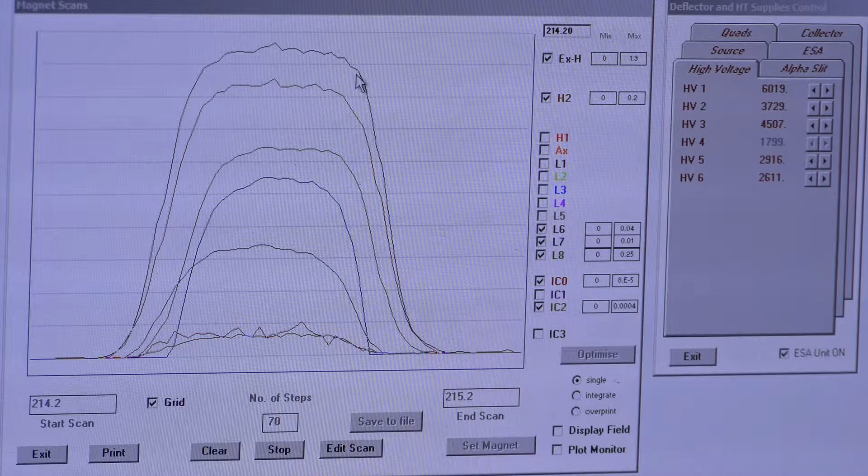Just a little note, there's this dip happening in thorium, and you may start to see it in the 238. What's happening is you're moving a little bit out, too far out on your slits at that point, so you're not really centering on them anymore. You're outside the range and it's clipping the signal. That's how you know you're pushing it too far with your quads—you'll see this little clipping motion.

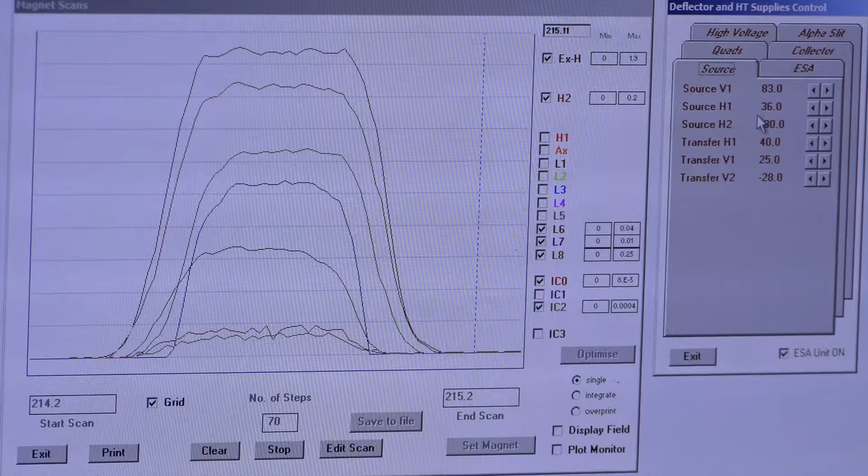Those are good indications you've pushed things too far. Another indication is you've changed a lot of settings and you didn't change anything in the instrument. That usually never happens, usually big changes in the instrument have big changes on the tune. If no big changes have been made, and it's not an old tune file, you shouldn't be changing quite that much. So always go back to your original and make sure you're not getting too overzealous.

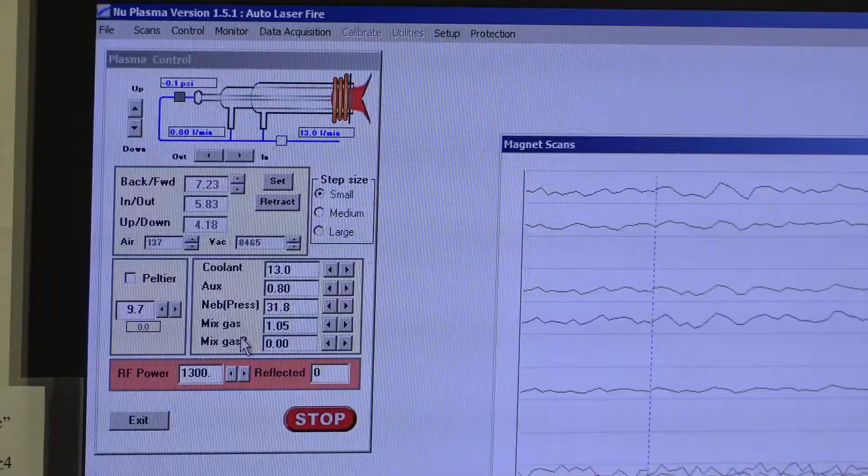So this peak is close to perfect, but it's not perfect. What you'll do basically when you're pretty close but not there yet is continue to go through those tune settings. At that point you may want to change a couple settings, looking at your peak, changing a couple settings, looking at your peak.

I've already told you the big ones, quads 1, HV5. Another one that will shift your peak left and right is Source H1. You can see how that affects your peak. But really, iteration is what counts with tuning in the new lab. So if it doesn't look good the first time, just try it again.

The very last thing we'll do once we have our tune as close or as good as we'd like is to adjust any gas settings that we feel might need to be changed. We've honed them pretty well, but things change, every day is a new day. So it's good to go over to your mix gas, your argon, your sample gas.

Our mix gas is sitting at 1.05, that's what it was for our whole tune setting. But I'm just going to see if we can do a little bit better in terms of signal intensity, but also signal stability. Mixed gas, because it's actually carrying our sample gas, as is our helium that I'll show you on the laser side, is an important component to check when you're tuning. So is 1.05 the best? I don't know. Let's change it to 1.04 and see how that changes our signal.

Now that I've had some time to look at 1.04, I'm going to go back to 1.05 and see how they differ. If I can't see any changes, I usually go with the one I tuned on, just because it's probably been the setting that's been working the best, that's why it's saved that way. But let's go up to 1.06 now, see how that looks.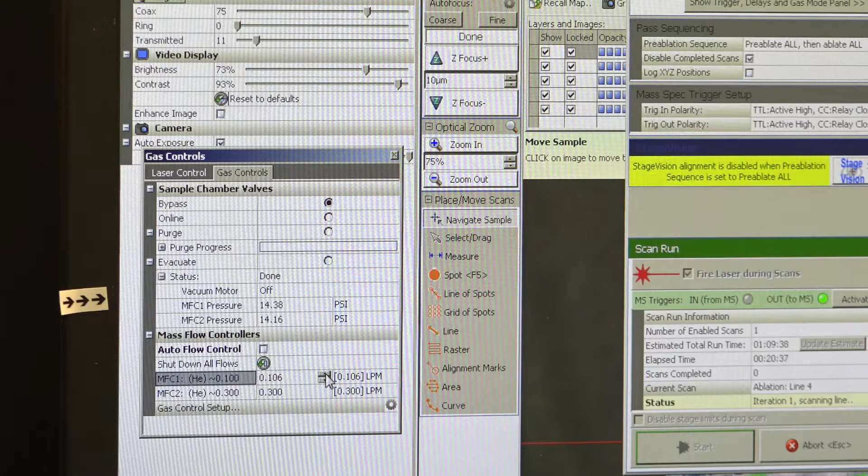Just so you don't psych yourself out, if you are seeing really giant changes, again check your crystal. Make sure you're not going over an inclusion or a crack or crossing another raster line, which is pretty important when you're looking at mixed gas because it does affect stability. So just make sure it's actually what you're changing and not the integrity of the crystal that's affecting what you're seeing.

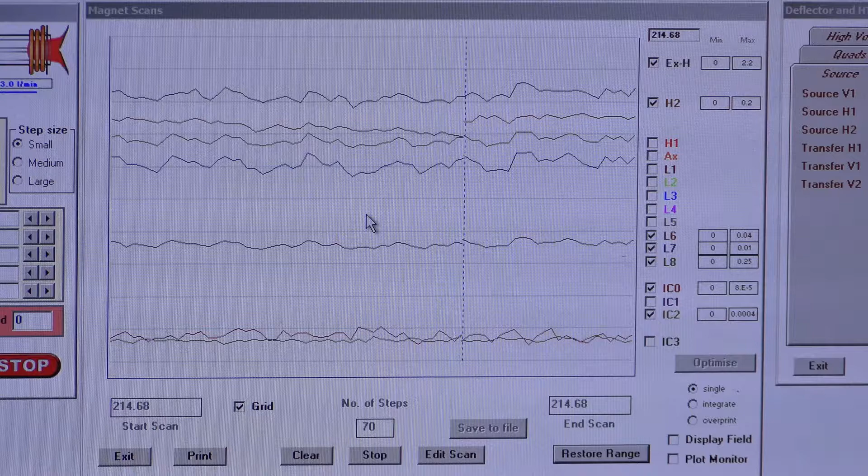So I'm going to move back to 105. I like it much better. It seems just as stable as all the others. It's a little bit higher than 106 and 104, I couldn't tell the difference. So let's stick with a mixed gas of 105.

Now we're going to look at the laser side and look at MFC1 and MFC2, which is our helium carrier gas coming directly from the laser. This mixed gas is coming from our argon that's just meeting up with the helium in the torch box. So they're both meeting at the torch head, so we need to check both. MFC1 currently sits at 0.1 liters per minute. We're just going to go up and down a few clicks to see if we can improve our signal. So just verify on the laser computer that your little arrow is where you need it.

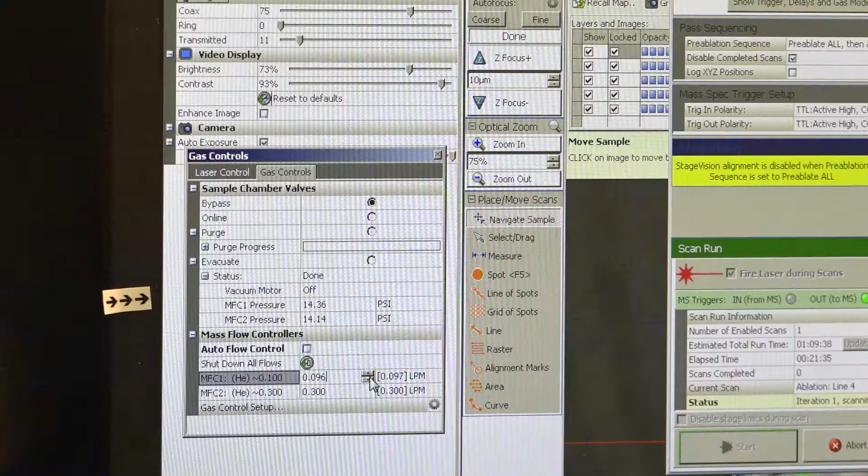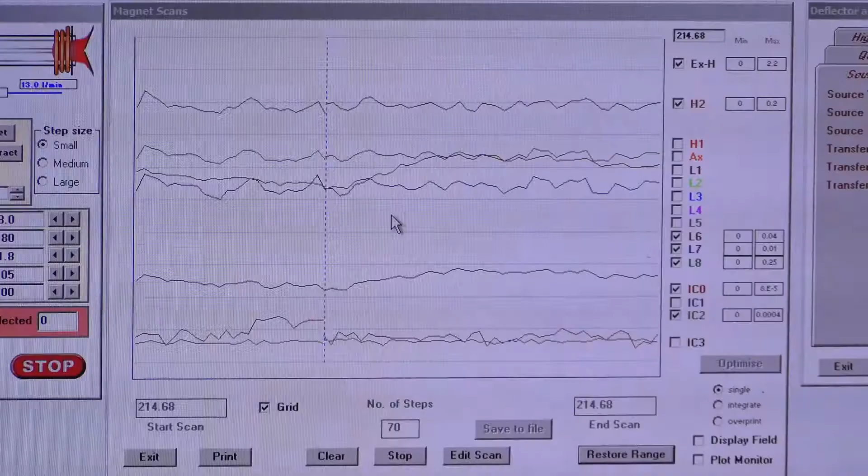Now I'm going to start to go up, and I'm going to watch my mass spec screen to see any signal changes. I'm not seeing a lot going up, so now I'm going to switch to going down in the liters per minute and watch the signal on the mass spec computer. Looks like we're gaining a little bit more.

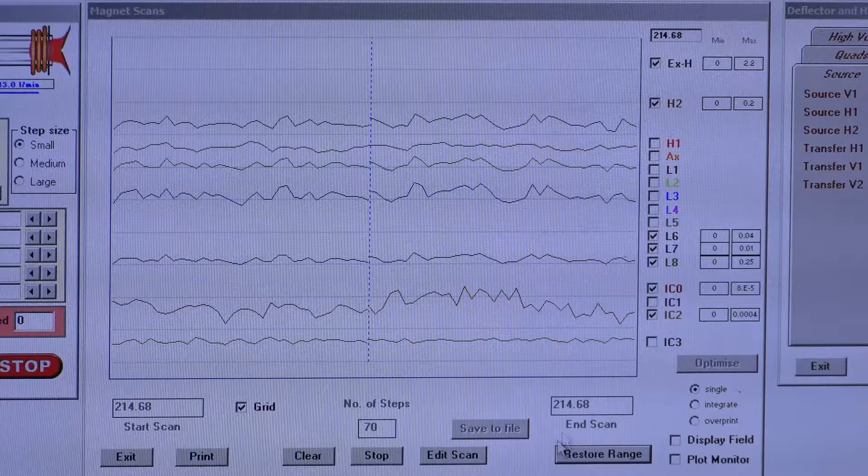I always like to give it a couple seconds before I decide that I'm in a good place, just because it takes a while for the material to actually get to the collectors as you change that carrier gas. So I'm pretty happy with that, but I'm going to go up again just to confirm, make sure I really am in the best spot, and I'm going to go down. And it looks like 0.097 liters per minute for MFC1 is going to do the trick.

Now let's switch to MFC2 and change that. That currently sits at 0.3, that's pretty standard running. So let's just go up, and we'll watch our mass spec computer to see if we see any changes.

That is not the right direction. Let's go down. We'll watch our mass spec computer. Still not looking great. I'm going to go back to our original setting of 0.3 and see if that improves it. We'll go up. We'll go down.

If you're not confident that you're actually making any good changes, feel free to just leave it at standard running settings of 0.1 for MFC1 and 0.3. I think for today, since I can't see large changes, I'm going to leave MFC2 at 0.3. Then we're going to go back to restore range on the mass spec computer so we can see that full peak.

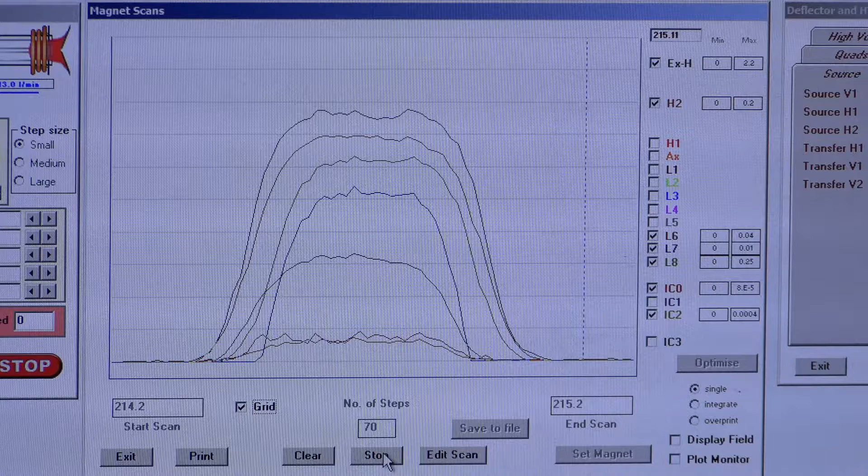One important thing to note on the laser software is that when you go from right to left, you'll always have a signal reduction. It's an artifact of how the cup and the arm and all of the gases flowing through it work. So if you've noticed 300 millivolts of signal drop and suddenly you're just going right to left versus left to right, don't worry. That happens to all of us. It's a bummer. But once you're going left to right again, it'll be fine. So I'm not terribly worried about the fact that I lost 300 millivolts.

What I do know is that my peak shape is pretty flat. I barely have any shoulders, and we're approaching a more vertical face than we started with in our original tune on these sides here. So if I were you, I'd go through it one more time. You guys know the steps by now. Once you're satisfied with that final peak, you'll go stop. You'll peak center, and then you'll exit out of this magnet scans window and then save that tune file, and we'll go over how to save it.

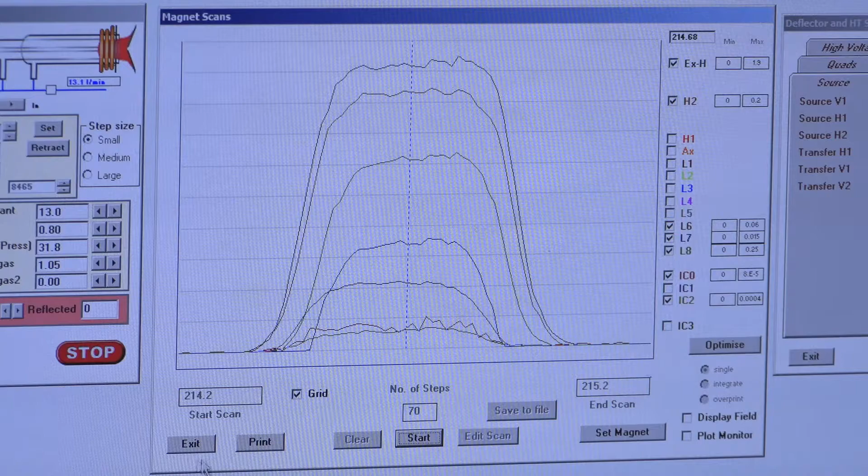So now we're ready to save our tune. What we do first is drag our vertical line to the middle to peak center. Now you're going to notice that some of these peaks aren't perfectly lined up, and they're never really going to be. The higher masses are never going to be perfectly under the lower masses, and the ion counters are always just a little bit off. So you just find the point at which you are in the flattest section, the most middle of each of those peaks. So if that means you're a little bit to the right on the ion counter peaks, that's okay.

You mostly want your uranium and all of your leads to be pretty symmetrical. So the ion counters may be kind of shifted, and that's all right. So this is, to me, my best midpoint. I'm on the flattest part of all of them. So we'll leave our peak there, and we'll just exit out of the magnet scans window. And then we're going to go to save it.

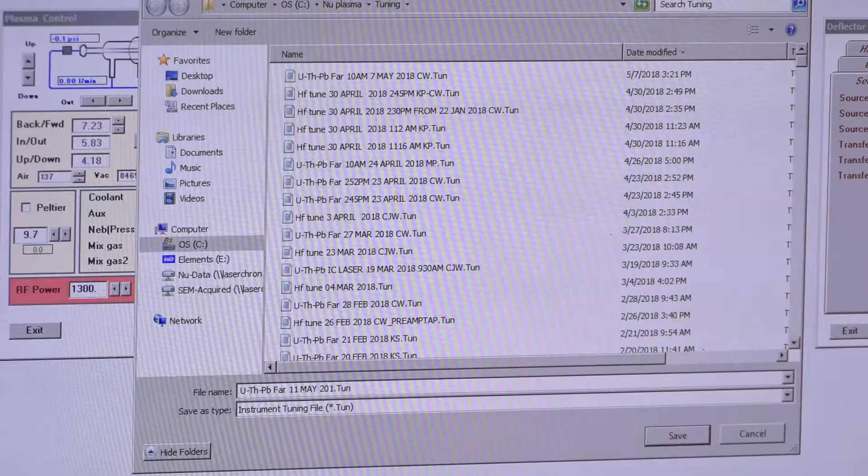To save it, you'll go back into Setup. You'll go to Constants, Tuning, Save. Now you're going to just save it with the same initial extension, so uranium, thorium, lead, Faraday, but you're going to add the date, any notes you might have, if you change something, if there's a new setting. And when I say setting, I'm not talking about a new high voltage, I'm talking about a very large setting, like you change cones or you change the ion pump or you had to do a procedure you don't usually do. Those are for your notes section.

So I'm going to add the date. We didn't do any major changes, so I'll just add my initials at the end. So today is the 11th of May, 2018. And my initials are CW. And then you'll save. And now that tune file is saved.

You can always go back and tune again, never feel like you can't tune more than once. And if you wanted to start from a new tune file and see if you got close to this original tune, you could do that as well. So anytime you feel like there's room for improvement, always feel free to go back, make adjustments, save a new tune file. It's always best to never overwrite any tune files, because you may have made an adjustment that you want to go back and see later on and track changes of. But that concludes tuning.

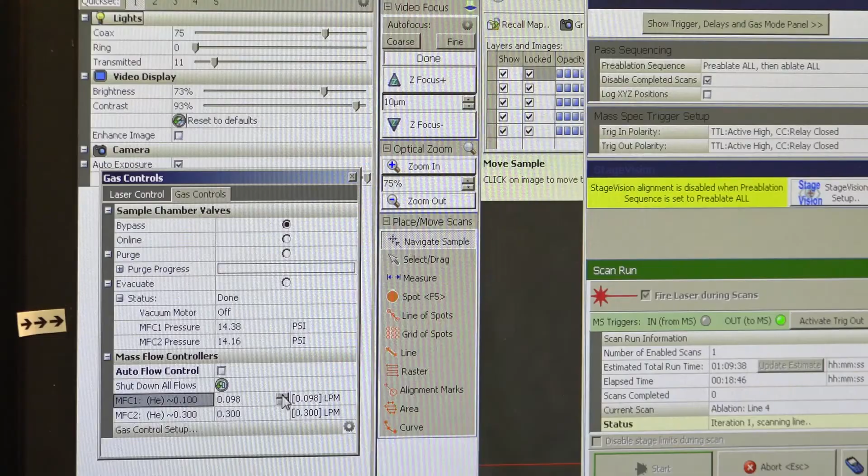Now it takes just a second for sample to get through to the detector, so I always give it 1 or 2 seconds before I start changing it again to see what I've done. And it looks like we're maxing out our signal here, so I'm just going to change my scale so I can see what's happening. And we'll go back, and we're going to bring MFC1 down. And your operating range for changing this usually is about 0.085 to 0.113 on MFC1, since it always sits at 0.1 liters per minute.